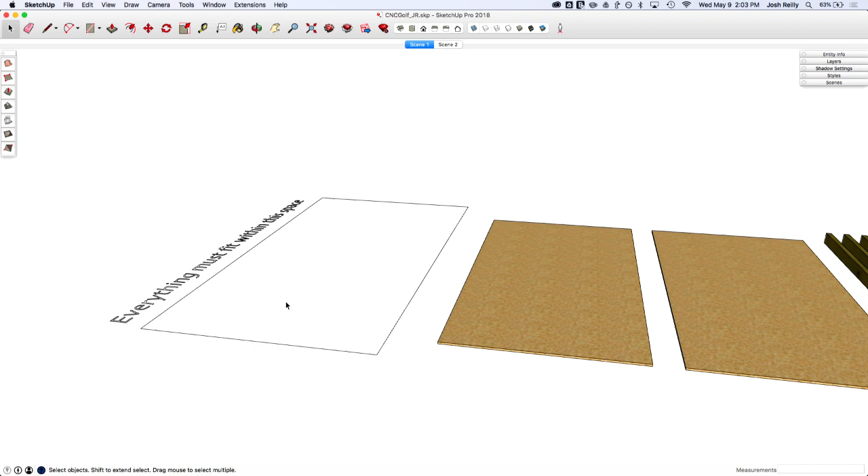All right, I'll start here. Am I connected there? Cool. I'm going to take a little bit different approach than Aaron might. What I'm going to do is make a skin that I can morph around some structure, which I can then pull material area off of instead of just cutting up some of the stuff here. So we'll see how it goes.

The first thing I'll do is grab the rectangle tool. Something we should point out is Josh and I have come up with these designs independently, so it's going to be fun to see what we have, because we don't know what we've done. I'm not even sure I'm going to draw what I plan to, so we'll see.

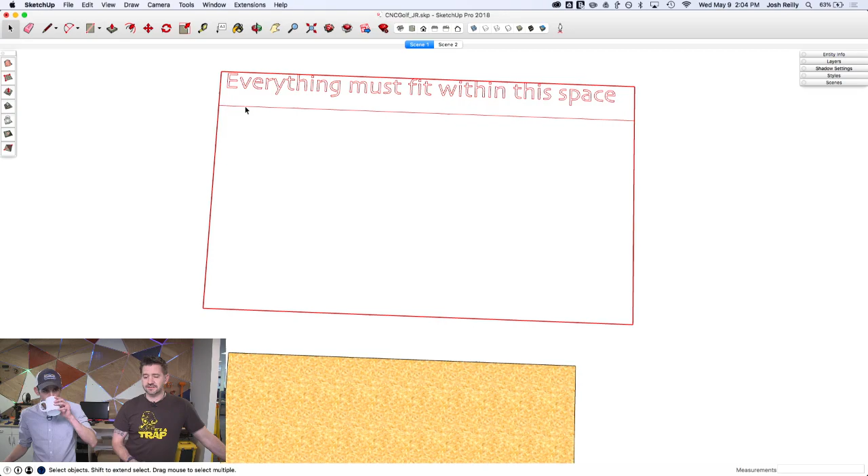Can you back up real quick and show the template? Yeah, so I'll erase all this great geometry—sorry to put you back, that one's on me. So this is the original template. Pretty self-explanatory. The group right there is locked, so if you pick on that, you can't change or modify that piece. Then the other 2 pieces, the ones that'll actually be cut from, are there to the side—the 2 pieces of plywood that'll be cut and the 4 2x4s on the ground next to the space you have to work inside of.

Yeah, so it's 5 by 10, right? Yep, 5 foot by 10 foot is the maximum footprint.

Okay, so I'm just going to divide up this surface here, looking for the midpoint so I can start to push-pull something. Get rid of that line, push-pull this—let's go 6 inches, see how it works. I'm going to get rid of that middle chunk, I don't need that. And I'll do a reverse faces here, and then I'll group that.

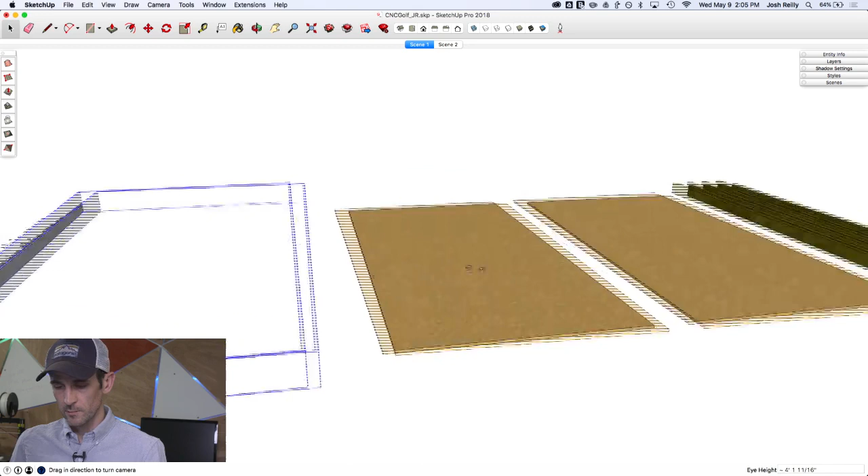And then I'm going to use the Sandbox—that's kind of like a boundary for the whole hole. Yeah, I thought about using the pieces of 2x4 over there, but I need those for elevating some of the stuff, so I'm going to use some of the extra plywood. Okay.

So I'm going to go to the Sandbox Tools now, which is in View Tool Palettes, and it's not an extension, it's actually a native tool set, Sandbox. I'm going to use this because I want to use some auto fold with SketchUp. I want to show how that would work.

First thing I'll do, you can see in the bottom right, it says 1 foot grid spacing, which is what I want here. I'm going to go 5 foot that way and then 10 feet this way. And I'm doing that because if I drew a rectangle of that same size, it would be all one surface, and autofold wouldn't work quite the same.

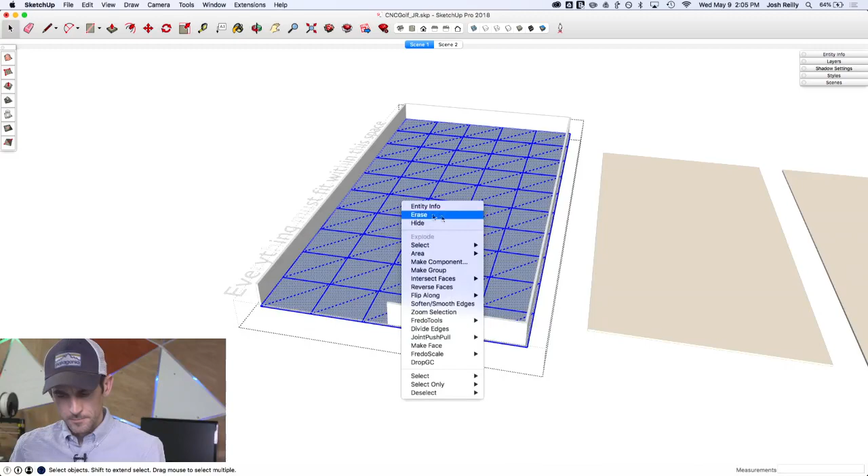So you'll see here how that works. I'm going to go in here and reverse those faces, and that's a good starting point. I don't care too much about the overlap right there right now, I'm going to leave that.

So you're really using Sandbox tools not necessarily to create smooth geometry, which is what a lot of the tools in that tool set have, but actually to create that initial geometry to work from.

As a little preview here, if I grab some of these quads, actually they're not really quads. If I do hidden geometry, they're triangles. Which is if you delete one of the hidden lines there, it would be a quad. But anyway, if I grab some stuff there and use the move tool and go straight up, you can see I can pretty quickly start to modify that surface.

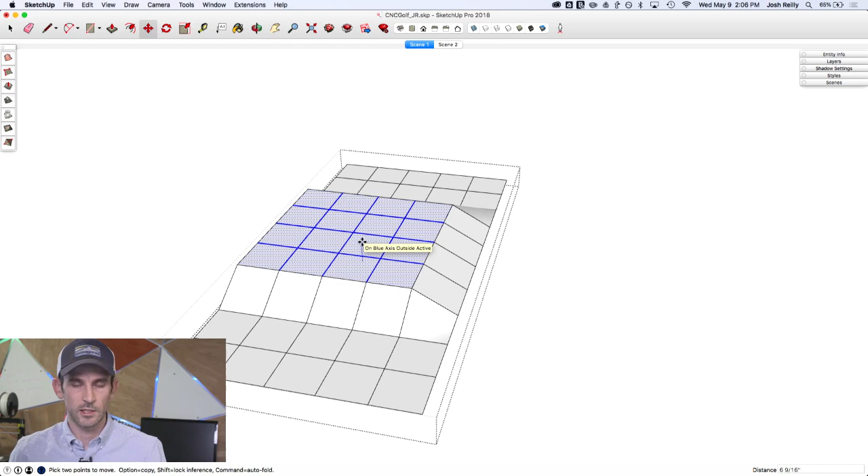So I just wanted to try this and see how it would work instead of using chunks of wood and just kind of use the rotate tool. So that's the goal there.

I'm going to first move these 2x4s off to the side here because we got some power tools coming in, need a little more space there. So the way I'm going to break up this board is I'm going to jump in here and divide it into 2-foot sections. The way I like to do this is just copy this rectangle, 2 feet and 3 times.

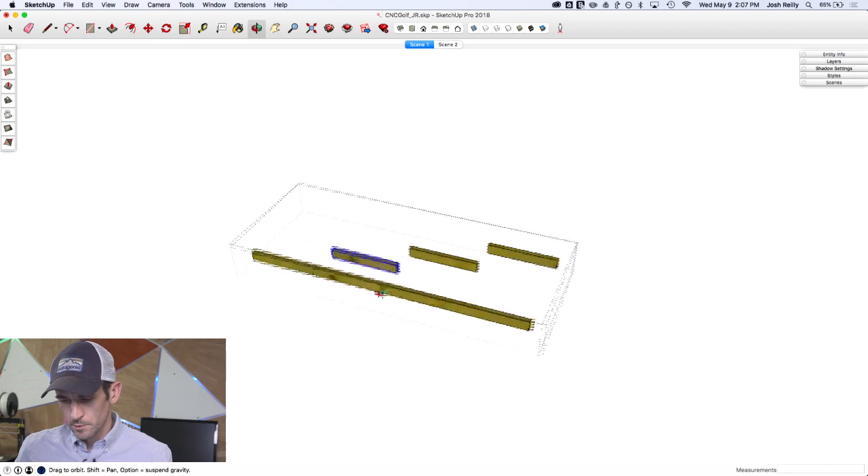That way I can just kind of grab this geometry. If I turn X-ray mode on, you can see kind of what I'm doing here. So I'm just going to copy that out, copy this piece out. Obviously I don't have to do this, I can create a 2-foot long piece and copy it 3 times, but in the spirit of fabrication, kind of building this like we're going to fabricate it, I kind of like doing it this way. But it's definitely a little bit more work.

I'll reverse these faces. But it is a good way to assure that you're actually using the material that's provided and you're not using anything extra. You're not going to accidentally require 12 2x4s when you actually only had 4 to use.

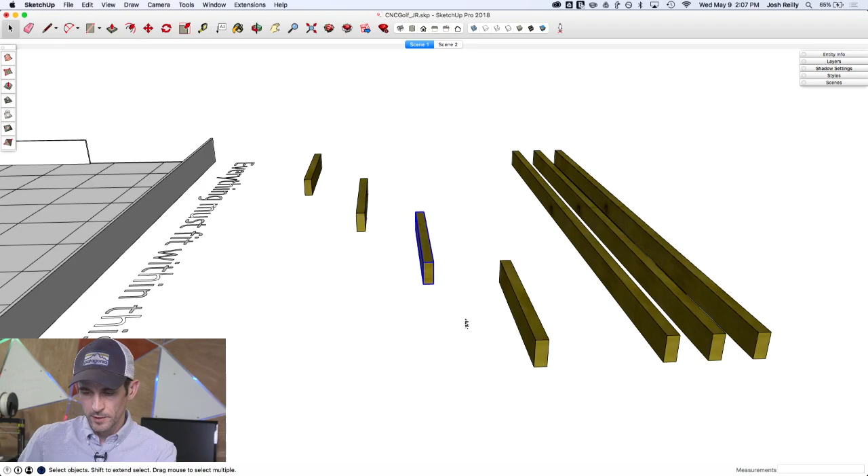So I'm grouping these little pieces with a shortcut for make group, just using G. And that's an important piece too, as we talked about this earlier, making these pieces groups intentionally rather than components. Because as you put these in, you want to be able to modify them one at a time, not have a modification to one affect all of them.

Exactly, yeah. And so now I'm going to just make a kind of a little box here, and I'm not going to worry too much about how these are connecting right now. Just want to get this kind of quickly going here.

X-ray is really good for doing things like this where I can pick the right points a little faster. So I got those connected, and we'll make a group out of that piece, and then I'll just position this where I might want it in the model. In this case, I'm going to throw this in the corner. So this is a little bit of structure that I might try to manipulate the surface onto.

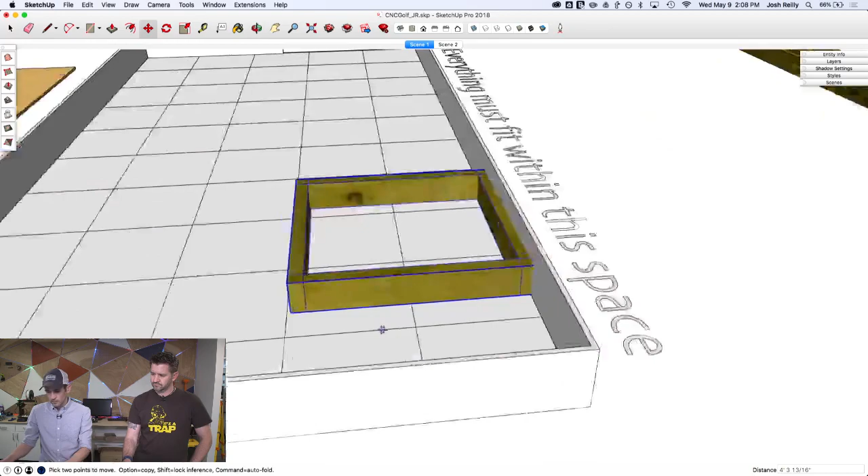So let's go and grab this corner here, go to X-ray mode, toss it in the corner there. And so you can see here, the goal now is to jump in here and pick the right surfaces like this. So I can use the auto fold, and it's only going to affect a quadrant of this larger surface. And I can hold down shift when it's in the blue axis and then snap on the top of that wood.

So of course I can see through that surface now and see the wood, which I wouldn't want in the end, but for now I just want to get the surface area, so I'm okay with that.

So I can keep going, or do you want to start yours? Sure, we can hop over.

We'll take a look at different ways to possibly go about starting this model up. Josh and I actually designed in bubbles, but we did not design complementary - we each designed our own things. So I'm going to go about mine in a little bit different way, but we'll see how that works. It'll work well, is how it will work, but it'll be fun to see how the differences turn out.

I'm going to work off of the exact same template - this is the same thing that Josh has. I'll have my locked group over here, and then my pieces I can work from here. I'm going to start designing shapes knowing that I'm going to have to come cut them from these pieces.

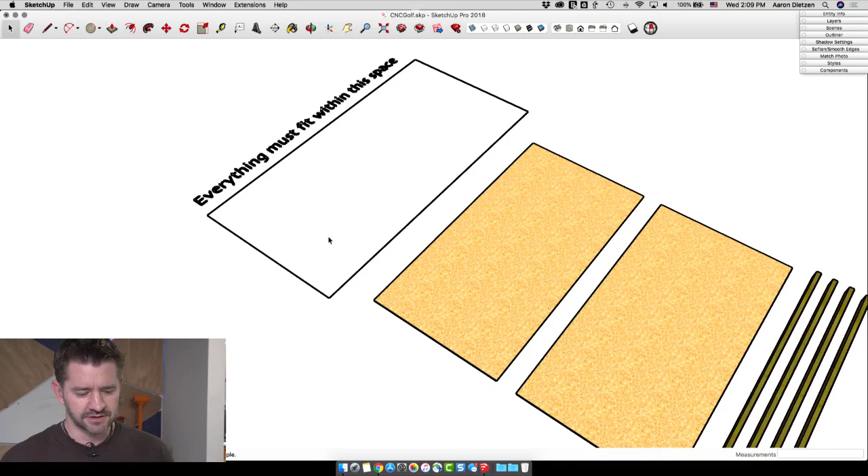The first thing I want is a half circle. The general design of my hole is going to be a platform here with a jump up to a platform over here. So rather than having a square right here, I'm going to create a half circle.

I'm going to start with a circle and pull that out 2 feet. I'm doing 2 feet because if I cut this across like this, I know this shape can get cut out of this piece of plywood because it's 4 feet across. So a 2-foot radius makes this a 4-foot wide piece.

I'm going to take that piece now and use push-pull to pull it up 0.5 inches, just a half inch, and triple click and make group. That is one of my pieces.

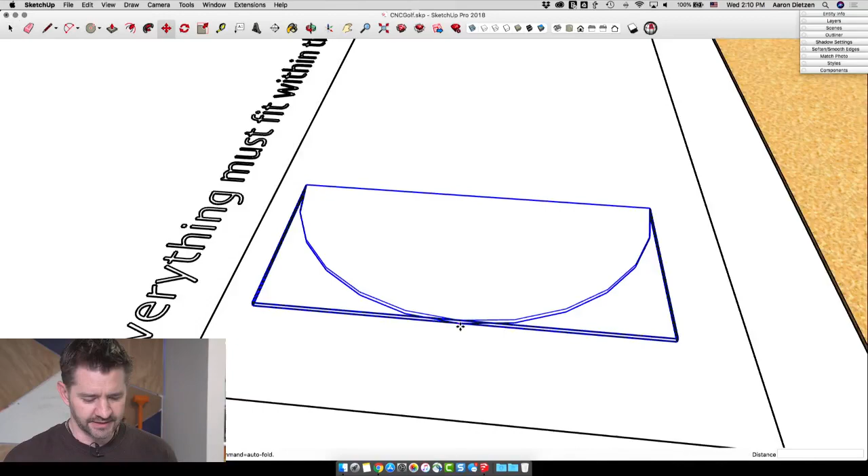I'm going to line that up right back here, right at the - ooh, a little jumpy, too much coffee this morning. All right, let's try it again. Where's the middle point? There we go.

That's going to be the base that I'm going to start the ball from, and I want that to go forward and then go up a ramp.

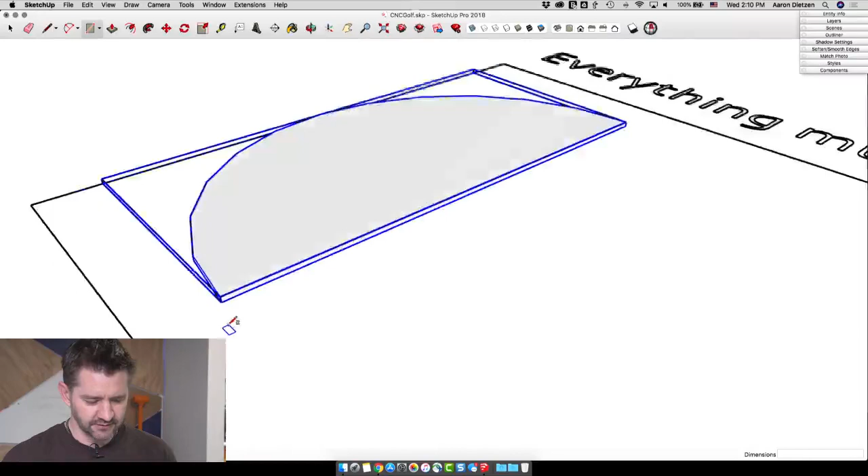So I'm going to create a rectangle right here, using this corner as a reference, pull across to here, and get in there. There we go, bring that out - we'll say it's going to come out 3 feet. So 4 foot, comma, 3 foot. All right, there we go, that looks pretty good.

And I want to take that, and I'm going to do this a little bit different - I'll just pull this up to get that same half inch, and then triple click and make it a group.

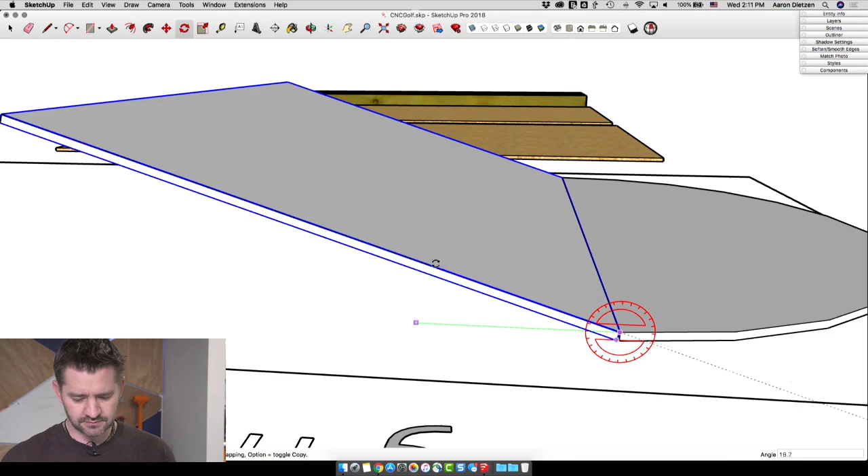Now to actually get the ramp, I'm going to use the rotate command, rotating from the top here. I'll click right there - see it snaps to the red. Click anywhere on this point and just pull it up. I don't know, how's 20 degrees sound? Good, I like it. All right, we have consensus. So that looks pretty good.

It's a little dull though, so I might come in here and chop this up a little bit. I'm just going to draw a line right here to indicate where the center is, and then maybe I'm going to do something.

I'm going to select this line right here - no, I'm not, I'm going to come this way. I'm making this up as I go. I'm going to come over here 6 inches, and draw a line down, say about 10 inches.

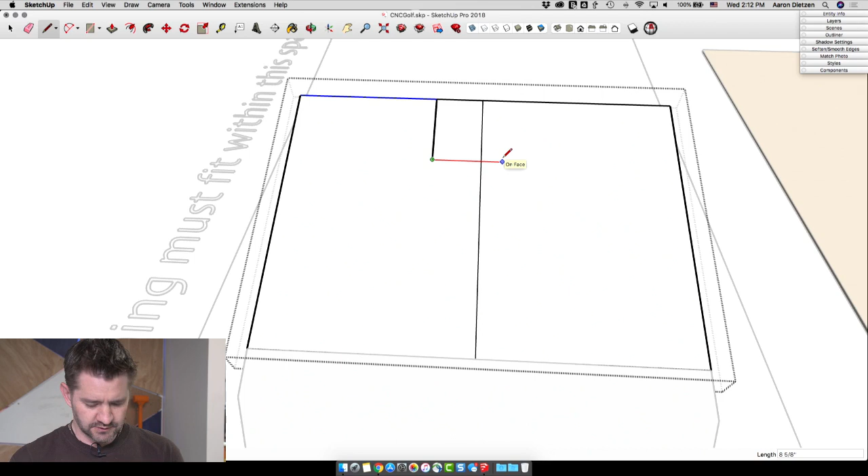Whoops, that was 10 feet - that's too far, 10 inches. I'm going to come across 12 inches, and I'm just using lines here, snapping along the axes and then typing in the dimension. At this point I can type it, click right there.

All right, I want a little gap in the middle there, so I want to make it so they have to choose one ramp or the other. So I'll block this off so they can't go up the middle.

It's still a little big here, so what I'm going to do is come from this middle point here, drag it down here. So again, I'm not worrying too much about specifically cutting out of a piece, but making changes to this geometry that I know will fit inside this space. All of this that I've created so far will come out of one piece of plywood with no problem.

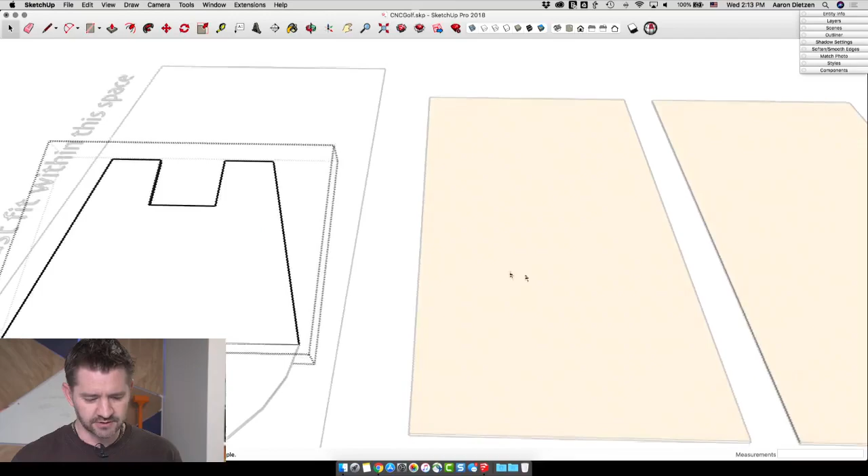The other thing I'm keeping track of is my 1/2 inch material depth. So if I look down here where this ramp transitions, I don't have any materials crossing over each other or anything like that. I know that these two pieces can physically fit like this when it's actually fabricated. So that looks pretty good.

Now I'm going to come in here, put a couple supports in real quick, and then maybe some boundary pieces, and then we'll hop back over to Josh.

So I'm going to have a 2x4 standing up from the ground to hold up this corner. I'm going to click right here, drag down the blue axes, hold on shift, and snap to something that's on the ground. So these letters of the template work.

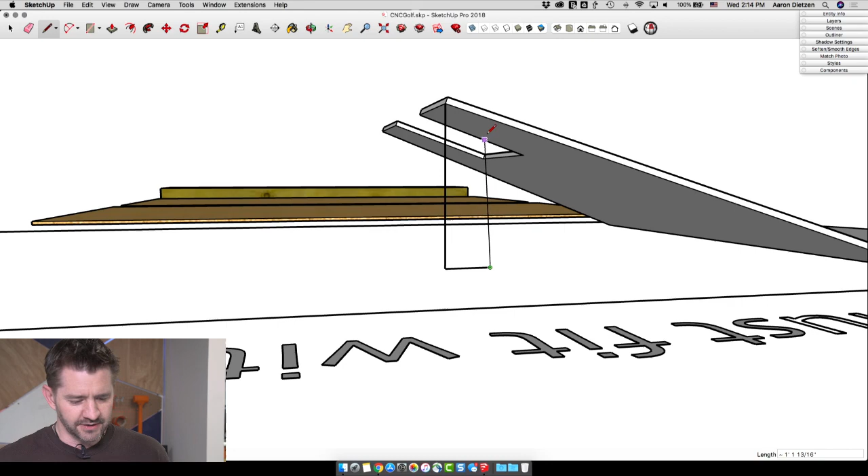Click right there. I'm going to come over the green axis 3.5 inches, because that's how wide a 2x4 is. Silly Americans call it 2x4, even though it's 3.5 by 1.5 inches. I'm going to come up the blue axis till I hit the face of the ramp, and then back up here. That'll give me a single plane there.

Now I can take that and pull it across here, use push-pull to make it 1.5 inches, enter. All right, so there is my one support.

I can take that and make it into a group, and I can copy it, option here. Again, I'm just using the move tool, hitting option or control before I click, and place it. So there we go, we got a ramp, looks pretty good.

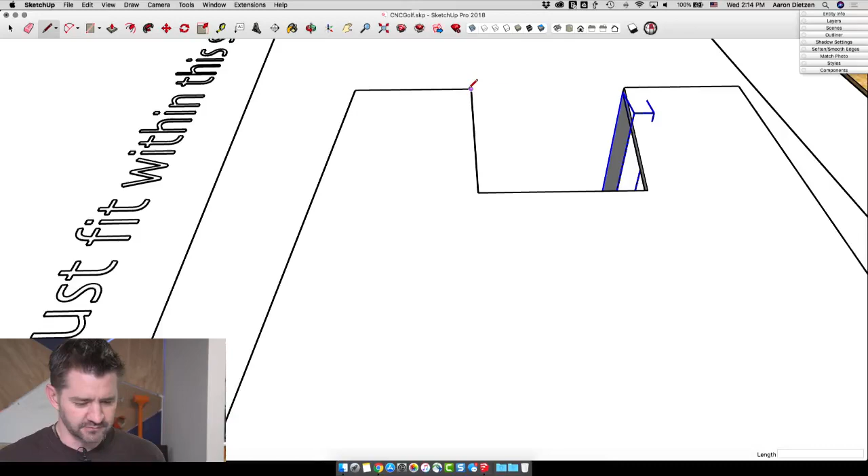I do have a couple things I want to change here. I want to get some 2x4s in here. Like I said, I don't want people to be able to take the middle of the ramp, they have to go to one side or the other. So I'm going to come over here.

I'm just going to draw the footprint of a 2x4 on this slope. So I'm going to come across 1.5 inches, and come all the way down - actually it doesn't matter how far I come down because I can use push-pull. Come back across.

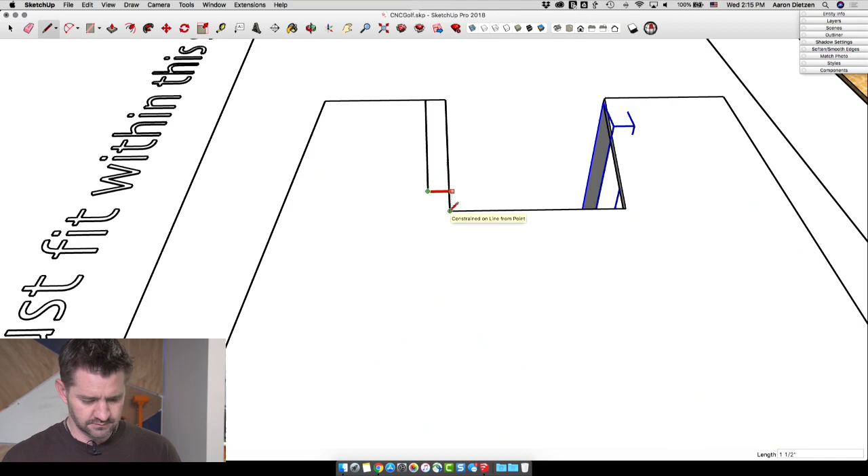I did not go, something was out of plane there. All right, try that again. This is what it's all about - screwing up live. All right, there we go.

So I drew my rectangle on top of that surface, and I can now pull that up 3.5 inches, and there's my 2x4. Triple click to select all the geometry, right click, make group. Again, just like Josh, I'm making a group because I want these pieces individually editable.

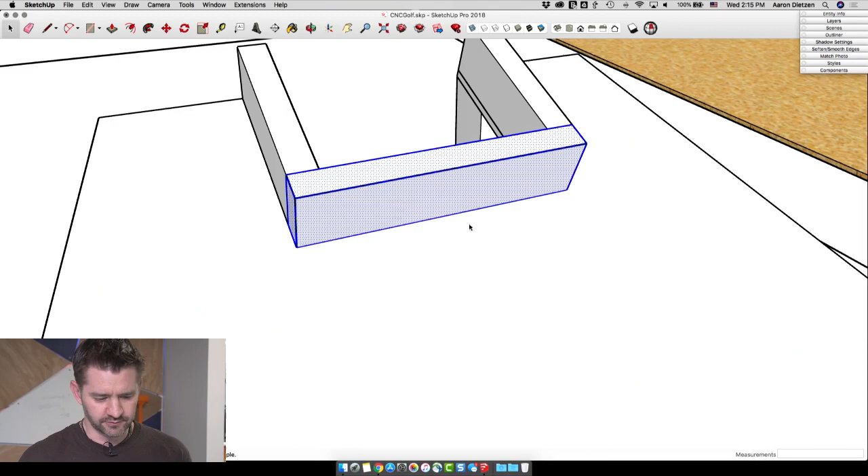I'm going to copy it across here. And then maybe I'll do the same thing right here where I'll come across like this. I'll come down 1.5, back over here 1.5, 1.5, pull that up, and again triple click, make that group. Last thing I might do the same thing down the sides.

I want to have something to prevent it from rolling off the side here. So I'm going to grab this, again with move, option or control click to drag it over and put it right here. Obviously that's an issue - I do have an angle here.

So what I can do is use the rotate tool, and I want to lock my rotation to this plane. So while my little compass is on that plane, if I just hold down shift, you see it turns magenta, and the surface I'm on turns magenta also. So as long as shift is held down right now, I can pick any point and it'll rotate perpendicular or parallel to that surface.

In this case, I'm going to choose this point. Then I'm going to grab this point and bring it over and let it snap to that line. I can use the same thing, double click into this group, push, pull, and pull it down there. Probably do the same thing, get another piece over here, and we'll hop back over to Josh while I do it.

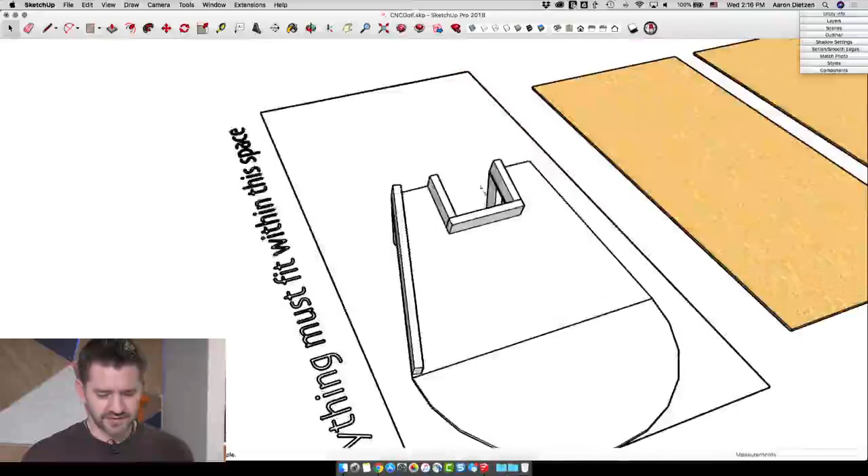You guys don't need to see that twice. You got the idea. Once Josh has a little more input, we'll hop back over and talk about where the balls are going to land once they leave the ramp. All right, let's do it.

First, I'll answer a couple questions that came through. I mentioned Sandbox Tools when I first started. I think the question is why are they called Sandbox Tools? Well, I didn't name them that, but I can guess why. Let's go to my screen here real quick.

So I have another surface here. If I go to this Smoove tool, S-M-O-O-V-E, it's not misspelled, that's what it's supposed to be called. You can see here that I have a radius of 6 inches. So before I start using the tool, just like a lot of tools in SketchUp, I could say, all right, let's do a 4-foot radius, so the radius of influence for that.

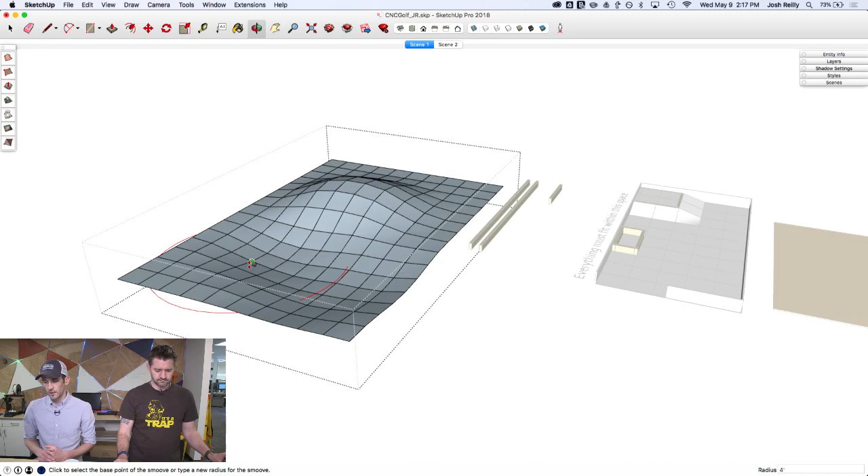You can see here as I depress and kind of push-pull things, that's kind of why they're called Sandbox Tools. They're often used for free-form landscape type stuff, but of course there's lots of ways you can use tools in SketchUp, not necessarily what they're intended for. So I think that's why they're named Sandbox Tools.

And then a question as well regarding what's the shortcut for X-ray. I made X-ray a custom shortcut, just use X. If you use X, you should know that when you do a linear or radial array in SketchUp and you do a number and then X, you can also do X and then a number to define copies. If your shortcut is X-ray, you have to do the number and then X.

If you do X, it'll engage X-ray, so just know that. It is a custom shortcut, like you said, though, so you can actually assign it to any key you want. And then we have one more question about the purple inferencing.

That was something I showed. Anytime you lock to a geometry, whether it's a line or a surface or anything like that, it will show up by holding shift. You can also get a purple inference from the down arrow key. Left, right snap to red, green axes, up snaps to blue. Down will actually snap to the last geometry you were hovering over.

So if you're drawing a line, you hover over a line, hit the down arrow, it'll snap to parallel to that line. Down arrow again will snap perpendicular to that line. So magenta is just the not red, green, blue axes reference. Yeah, it's anything but the main cardinal directions or the main red, green, blue.

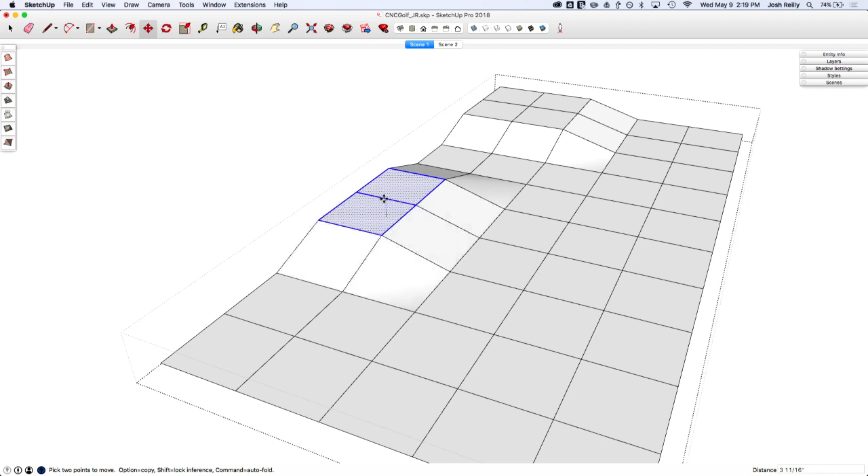Okay, back on my screen here. So while Aaron was talking, I chopped up this 2x4, so you guys don't need to watch that again, but I made it a 2-foot by 1-foot piece, and I'm going to jump into the Sandbox Tools and just select these two. And the way I'm doing this is I'll turn the rest of the model off temporarily, just grabbing those two squares and bringing them up, and with the Move tool you can do that.

And if I go back and see the rest of the model here, I can hold down Shift and then kind of snap on that height. All right, looks good. And look at that with X-ray mode. Looks pretty good. And then I'll move on to something over here now.

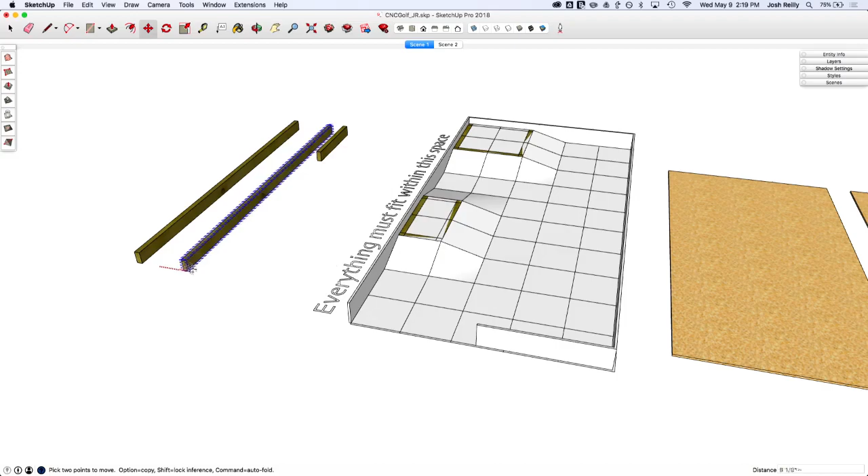I'm going to grab a full length of one of these 2x4s and just toss that over here as kind of a divider. So I think I'm just going to put this in the corner here. And X-ray often helps here. Even when I can see a pretty clear endpoint, sometimes X-ray just makes it a little bit easier to align to things like that. So that's why that's a pretty nice shortcut to have.

I'm going to go over here and make a bit of a ramp. And in this case, I want to delete some geometry. Well, I'm going to first group this stuff. So I'm going to group this run of squares here, go in, and erase some of these lines so that if I move this square up, it will auto-fold the rest of that geometry. But you'll notice here it's not actually going to work like I would expect.

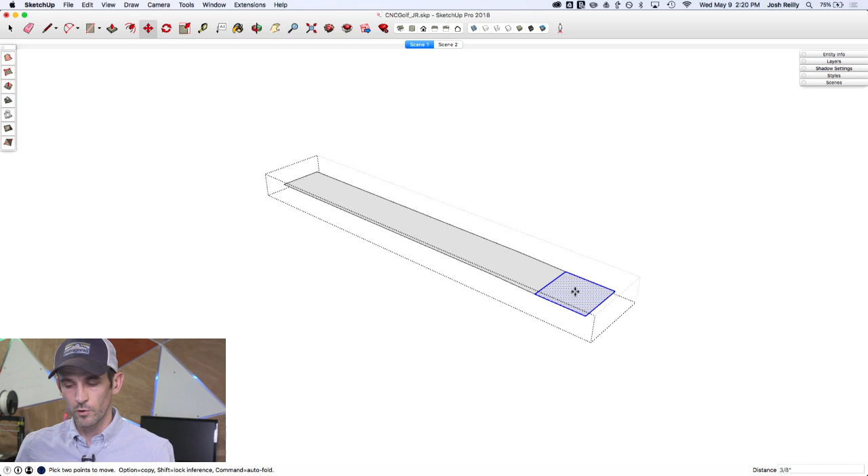And that's because with the Sandbox Tools, I was given some extra geometry here that I don't really want. So I'm going to get rid of these diagonals. And then now, if I move this up, I can just say, let's go 1 foot high.

And are we still live? Yeah, still going? Mm-hmm. All right, that's good.

Cool. Everybody got quiet over here. We're in awe, just couldn't speak and watch at the same time.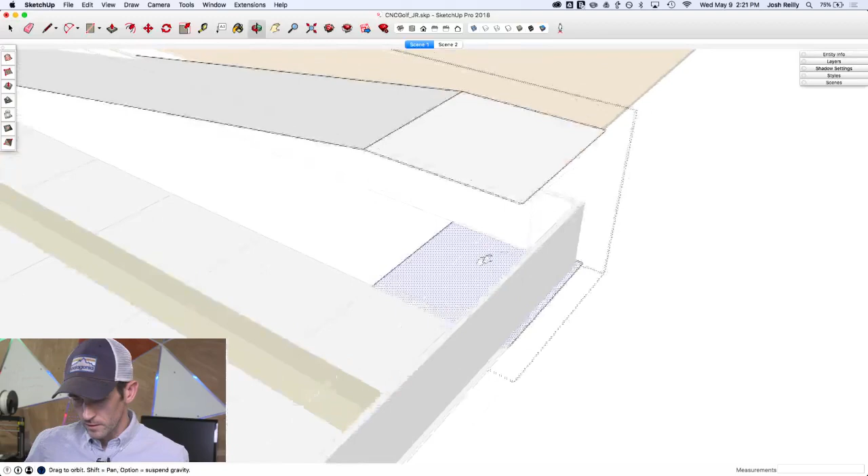Okay, I'm going to grab this piece and drop it down, copying that down to the bottom here. Let's go ahead and make the end hole here. I'll turn the rest of the model off and inference that midpoint, find the center, and make a 4-inch hole. Actually, I want a 2-inch radius. There we go.

So what I'm making here is kind of a ramp, I'll call this the 'where heroes roam.' If you get down here, you can try to go on this ramp that doesn't have any edges and drop the ball through this top hole, or you can go around this way. That's what I'm going for.

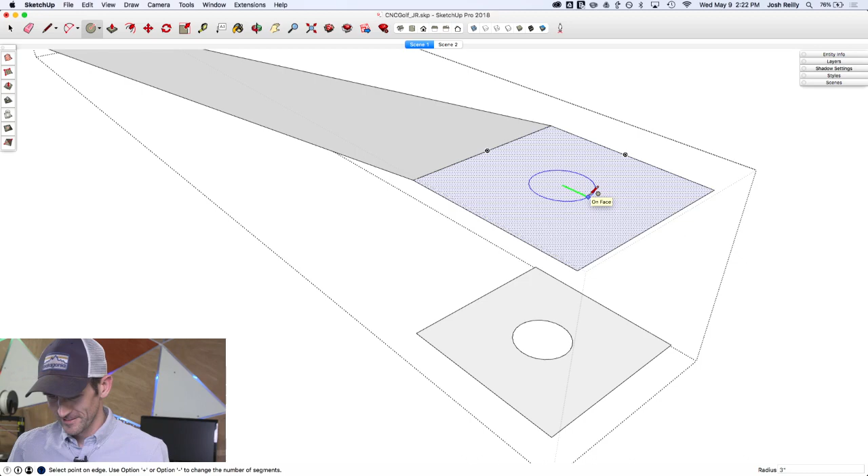I'm going to make this hole a little bit bigger. So it doesn't sound like what the heroes would do, but that's okay. Well, you're rewarded for attempting to be a hero. All right, so that's a bigger one if you want to go that route.

Okay, I think I'm going to also grab a support for that. So you can see what Josh is actually doing is using those 2x4s as kind of stock material that he's cutting from. You're actually referencing and removing pieces as you use it.

A little different. So what I could do on Aaron's comment there is, let's cut this piece out. Again, I'm inside a 2x4 component. If I turn the rest of the model on, I'm still able to inference other geometry, which is pretty cool for things like this where I can cut this away.

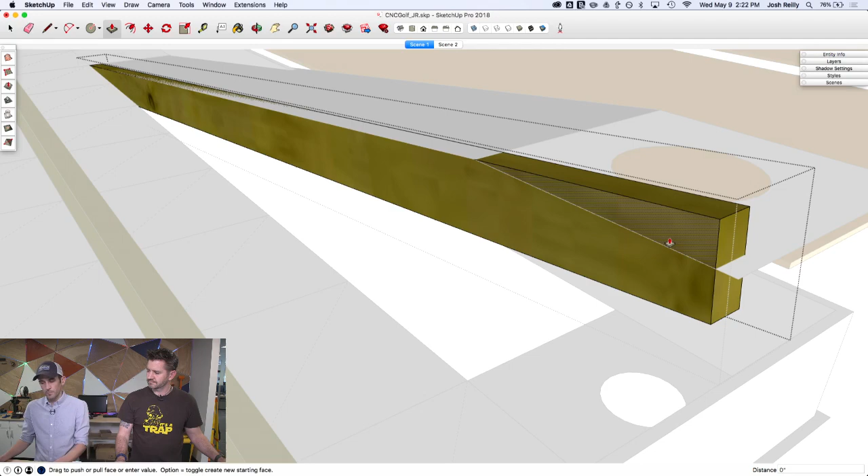But let's say we wanted to use this scrap. Maybe I'll copy this up just to remind myself, hey, I've got a little bit extra wood there. Then I'll pull this away. Actually, let's make this a full size there. Might as well color that wood color. Then I can pull that away to get rid of it.

And got a nice doorstop there, I guess. You never know. Cut this out and paste it in place. I'm using a shortcut here for edit, paste in place. Paste in place is a great way to move something from one context to another.

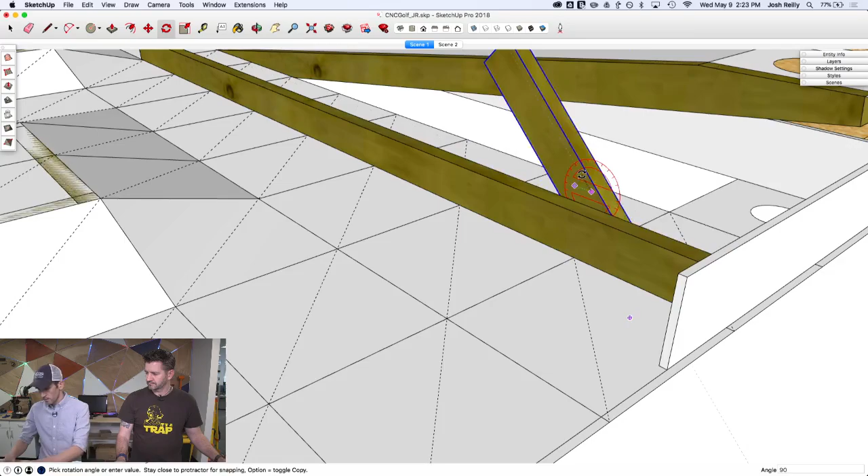So there's a scrap over there, and that's looking okay. Obviously we need a little bit more. This scrap from the previous piece is going to be a nice vertical support, so I'll rotate it up 90, and then grab a corner. I'm not going to worry about the extra on this part for now, so got some extra on the bottom too. It looks pretty good there, and turn off hidden geometry.

So we can go back to you, Aaron, or I can keep going. What do you think? Sure, I'm ready to do some more stuff. Okay, as usual. All right, so

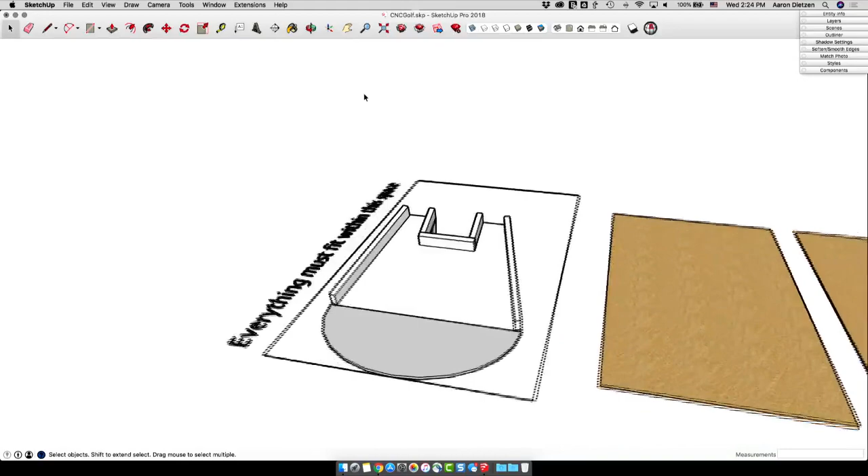we'll hop back in here. And this was actually not intentional when I started modeling this, but when I first started I put this geometry in, and I realized when I went to the top, it looks an awful lot like the Millennium Falcon. Don't act like that wasn't intentional.

Initially, well, it was this time, but on my first design, I thought it would be cool to not have a square here and then to have these two ramps, and then I went, hey, that's awesome. But it helped me for the second part of my design because I decided that if it's charging towards something...

what I want to do is take, so this Millennium Falcon ramp took up most of one piece of wood, so I'm going to use the other piece, cut it in half, and create two things.

So I'm going to come over here and create just a, wow, that's some weird snapping stuff going on. There we go. So I'm going to make a 4-foot by 4-foot square.

I'm going to pull that up half an inch to account for the other half of my piece over here. I'll triple click to make that a group, and move it so it's centered in my space, centered with the ramp.

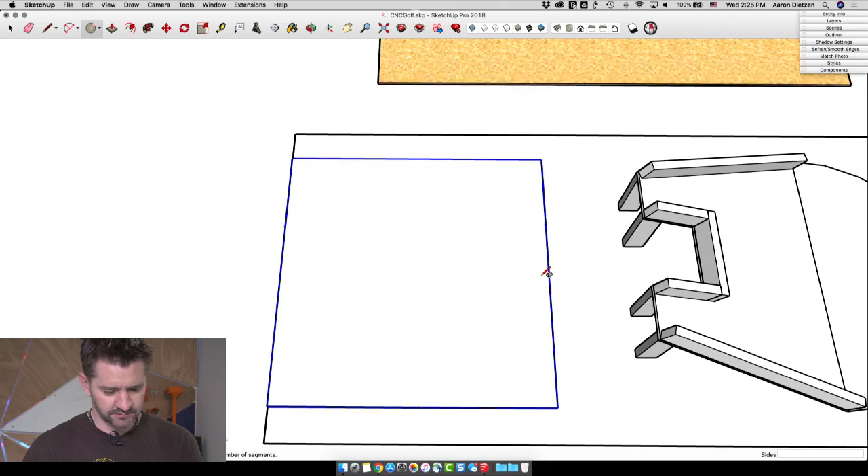This is where I'm going to put my hole. I'll put it maybe, right about, off the center, 2 inches. I did that out of context, so I'm going to delete that and double click and try again.

I'm going to draw a circle. Use that middle point, pull it in here, 2 inches, and then pull that to the bottom, let it snap to that bottom face. There we go. So that's the piece it's going to go onto.

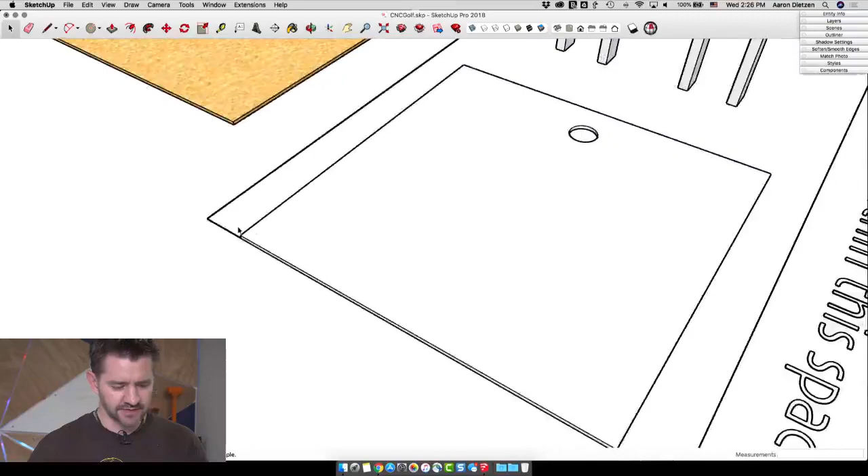Obviously the issue I have right now is if I hit that hard enough, it's going to clear the whole thing. So what I need is a backboard. I'm going to do a couple things. One is I'm going to put something to attach the backboard to, so I'll put a 2x4 right here.

I'll click right here, bring it over here. When I'm drawing a specific size, a lot of times I'll rough in where I want that rectangle to go, then look at the dimensions field in the lower right corner. Right now it shows I'm drawing something that's 4 feet by about 2 3/8 inches.

So what I actually want is a rectangle that's 4 feet long, comma, 3.5 inches. That's a 2x4 laying flat. If I pull it up another 1.5 inches, all right, so that is my support.

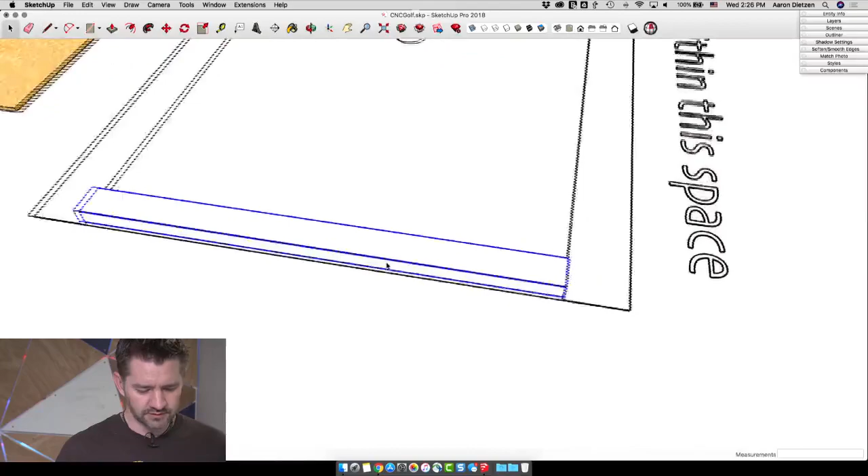Now I'm going to draw one more. Actually, I'll use the same thing. I'll grab this group I just made, grab it by the midpoint, click right here, and hit Option to make a copy. I'm going to put that at the middle of this 2x4 right here.

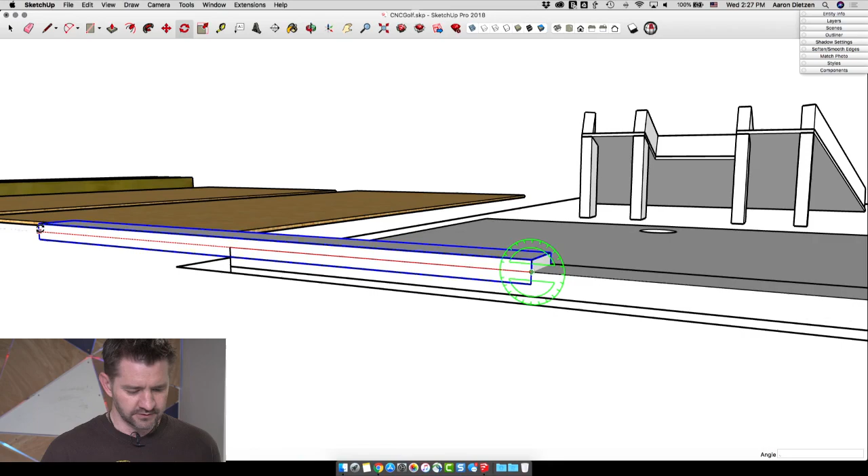So they're overlapping right now. I'm going to hit Rotate, click right here, and drag that vertical. All right, there's my backboard. 4 foot piece, 4 foot piece. So this is one 8 foot 2x4 here.

Now I want to put my backboard in the middle here. This is where I got inspired by my original design, because rather than putting just a rectangle here to bounce it off of, I figured I'd put a plywood version of the Death Star.

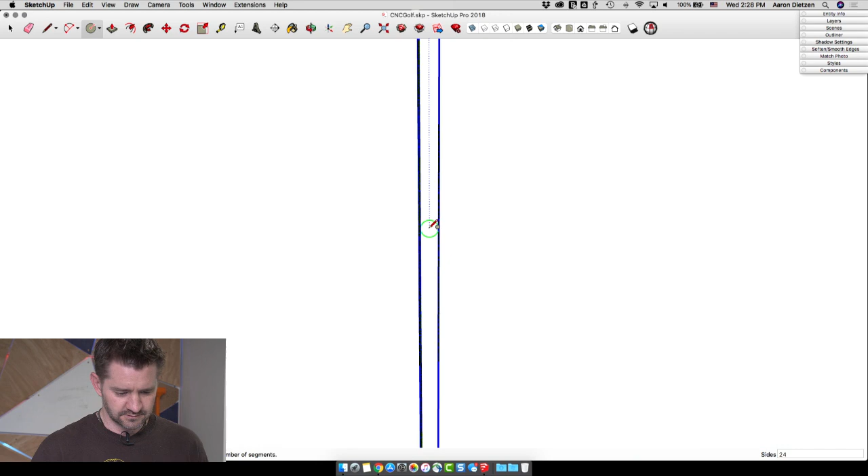Don't get too excited, that just means it's going to be a circle. I'm going to grab a circle and find the center of this 2x4. I'll snap to the middle point here, start pulling it across, then get this center point right here and drag that down. Let me zoom out a bit so I can see where the center point is. There we go, center's right about here.

And I pull that up. I could type in 2 feet, but if I snap right here again, because it's a 4 foot piece, the snap point at the top is 2 feet. Click there and pull that out 0.5 inches. Again, triple click to select all the geometry and make that one last group.

So from there, this was pretty much my simple design. I have a little ramp. I can choose to shoot on the right side or left side. It's going to go up, bounce off the Death Star, and hopefully end up down here inside that hole.

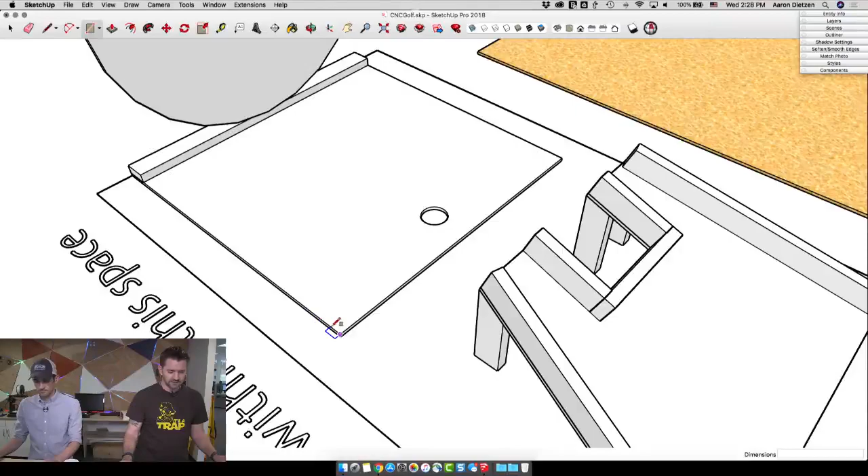I do have a little bit of material left, so if I wanted to, I could come in and maybe place one more piece of wood. I'll copy this again and put it right here, just as kind of a backboard. Maybe I'll rotate it vertical and use Move to slide it over here.

Then maybe I'll move this circle forward a little bit so it's not quite so close to the back wall. But that is the general idea. I actually have enough wood, I think one more piece left over where I could close that square up altogether, but it's a little more fun if it could possibly roll off into the inky blackness of space.

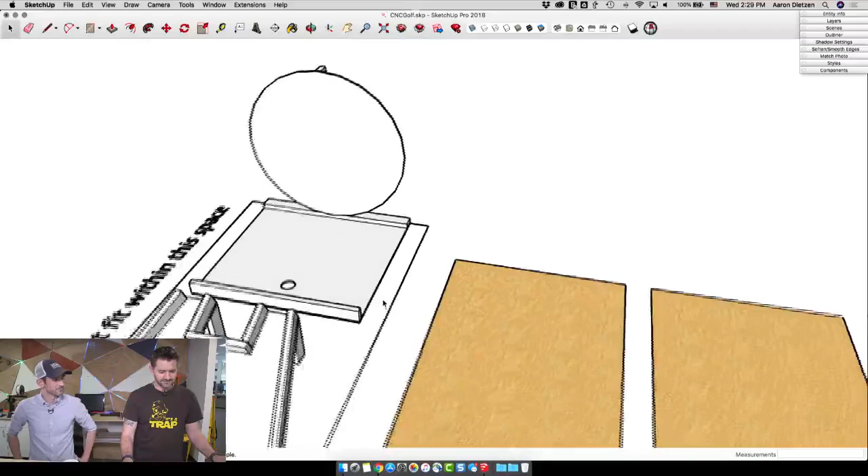Dangerous fun, that's right. So there you go, it's a little action scene too. Watch the Millennium Falcon fly over to the Death Star. Nice, that's pretty cool. In case you were wondering, that was cool.

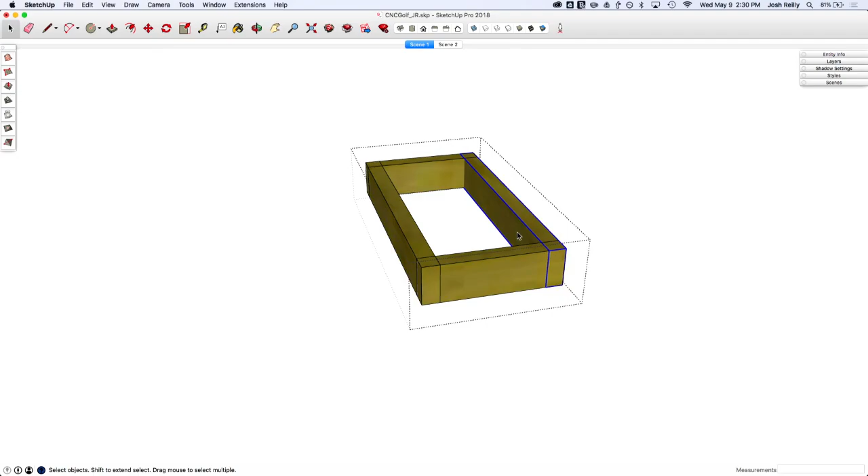So I added a few more things as Aaron was talking, just added some supports there, and I was realizing as I was doing this that this method's kind of cool, because let's say I wanted to make a modification now. If I wanted to move this over to the side, I can just do that, and this actually would save me some wood. So I'll do this, and then snap that to this piece. That means I can take this piece of wood out for future usage, and now I can easily modify this terrain, because if I do that and snap to the bottom, it kind of goes back to where it was.

And if I go here and grab these two, actually I should pull these supports out just a bit. Look at that, perfect fit, perfect. Not intentional, but that's awesome. I'll move this along the vertical axis, snap there. So there I just modified the course. That's pretty cool, got an extra piece now.

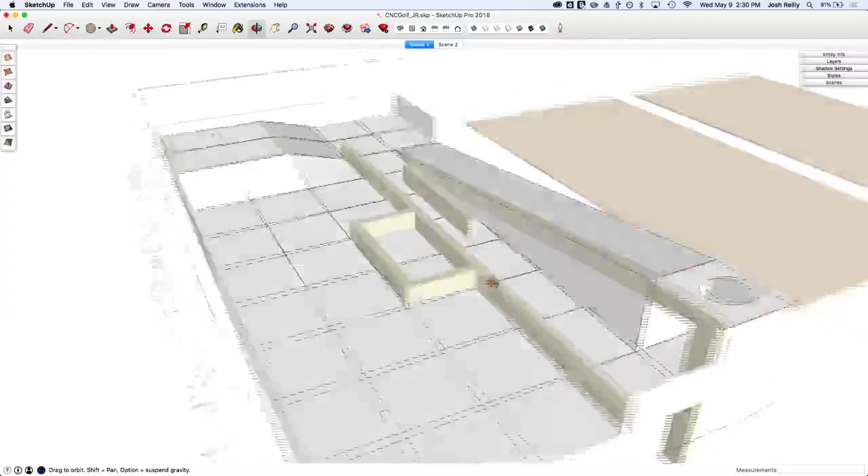Ooh, you know what, I actually don't want that to be angled, so I'm going to go back here. I think what I want to do is group, let's check this out and see what I have to group here. I need to group these separately, I think. Let's see if this works. If I group that, then go in, then do this, then go up, you can see it's now not going to... so it's going to auto-fold only what's in the group.

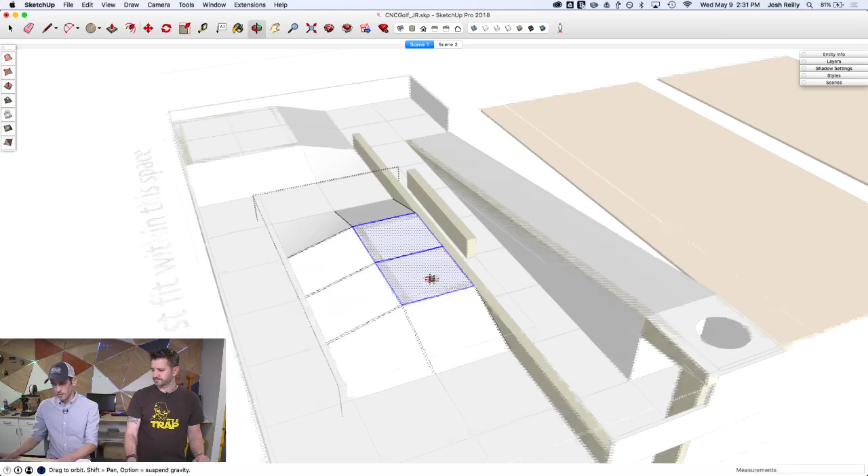So now I can more easily control that, and I've left this kind of flat for those people that have a lower caliber of bravery. They can go this route.

But you know what, I got an extra piece of wood now, so I'm actually going to put that piece of wood in the way, over here, paste that in place.

There's just no easy way through this thing, is there? Well, this is the easier way, but there's still fraught with peril, I suppose. It's light peril, but it's peril nonetheless. You can probably get around that, but it's to deter someone from not taking the brave route. So if you want to be a hero, you can try to one-putt that one up there, or you can go around.

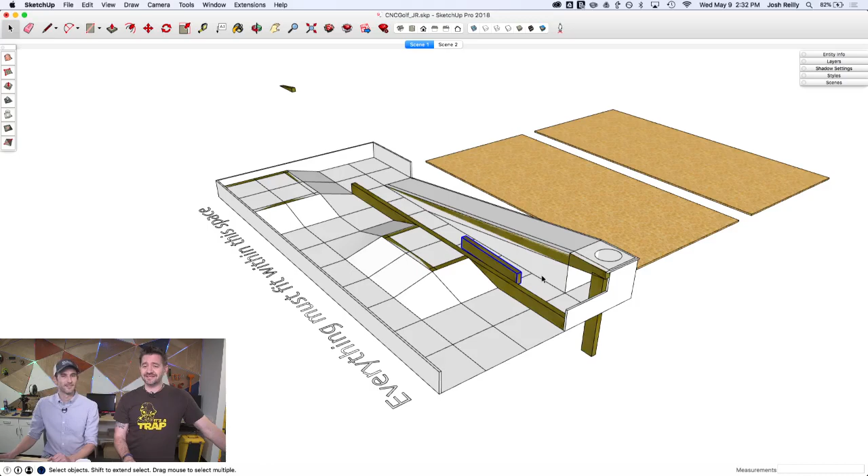Speaking of heroes, we just got a notification that David Kenyon is planning on coming to 3D Basecamp from Sri Lanka. Wow, so nice. I don't know exactly where that is, but I know it's far away, so way to go. It's just south of India. Josh is all over it. That's awesome, well we look forward to seeing you at Basecamp, come up and say hi to us.

Okay, so now I had a question with this, Josh. This looks like an awesome way to rough in geometry, but you're basically pushing around planes, right? This is flat geometry, not actually like plywood, it's just flat planes as of now. Conceptual at this point. Right, and now I can decide what I want to make, have some thickness to cut out. So that's a good time to do that.

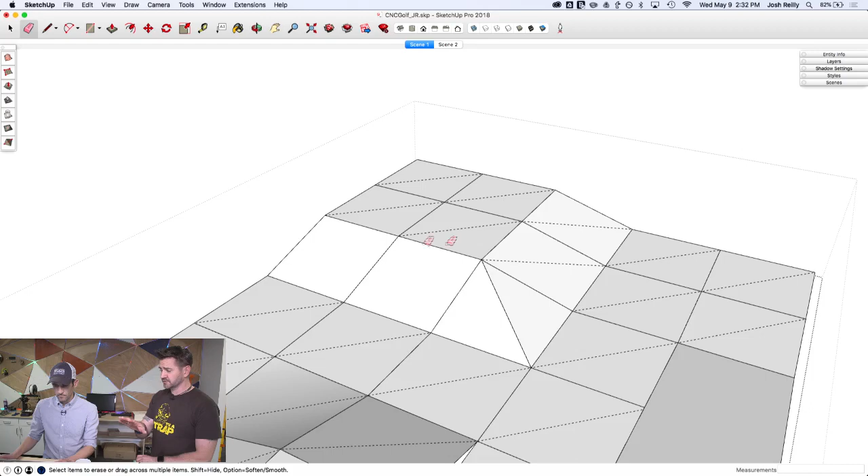So one thing I want to do here is optimize the boards. I'm going to turn on hidden geometry. Let's see, I want to connect this piece there, I think, and I don't need what's below, it's extra stuff there. This is normal, nothing special you did. When you create that grid initially with Sandbox Tools, those extra lines, those smooth lines automatically show up, and now I'm getting rid of them because I just want to push-pull the pieces that I would then cut out of the board.

So if I push-pull, let's make a group out of these first. That's a nice safe group. Jump in here, we'll group this as well, that as well.

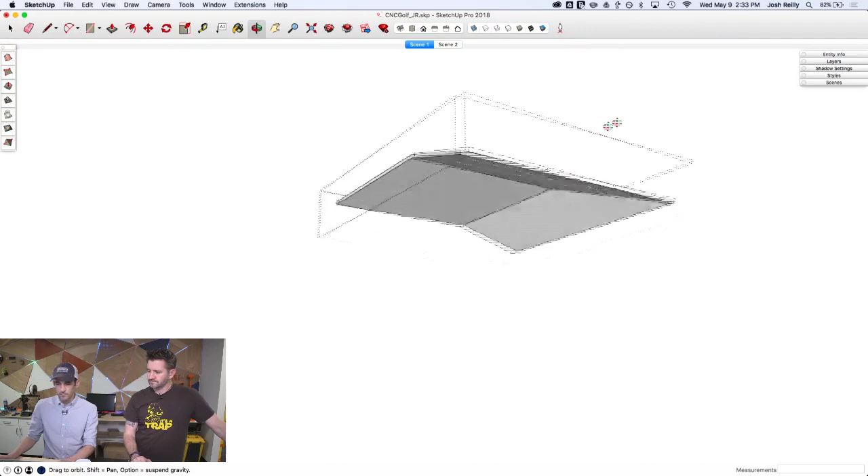Again, I'm using G for group, which is a custom shortcut—it's a lot better than doing the right click and making group. Now I can jump in and push-pull the thickness, which is 1/2 inch. Go over here, do that again, double-clicking with the push-pull to repeat that. All right, so now I've got some actual boards here. If I jump into this group, now that's a bit more meaningful chunk of geometry.

That's actually buildable, you could actually make that. One other thing I want to show here is if you're trying to get an area of the stuff you want to cut out, one option in SketchUp is to use area by material, but you got to be careful with how you use this. If I jump in now, you can see that this template Aaron made has this plywood texture on all surfaces here. So if I right-click and go to area of material, I'm going to get a number that seems right, but that's because we're inside a group.

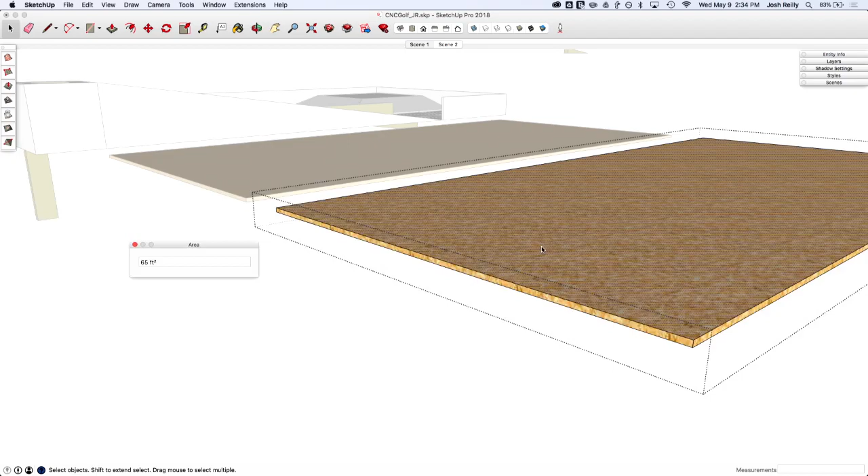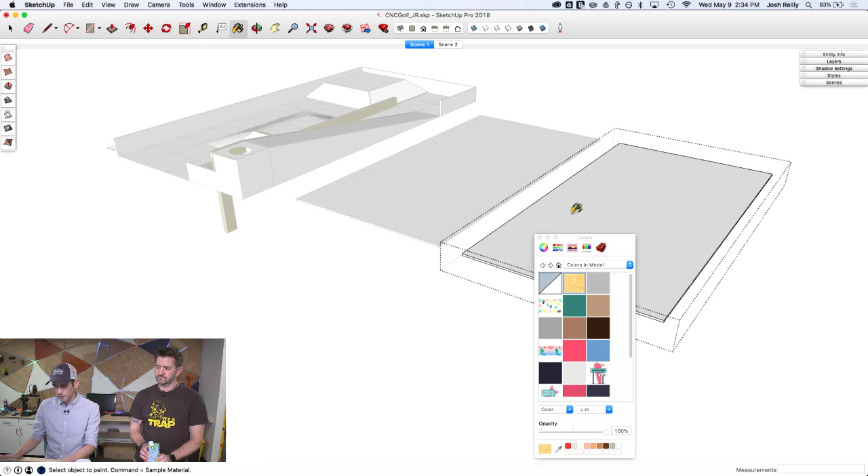It's taking the material area from everything inside the group, not outside the group, and it seems right because it's both sides. So if I really wanted to do this correctly, I would probably color these back to the default material. Go over here and do the same with this one. Now let's take that same color swatch and apply it just to the top on both of these. If I go in here now and right-click area of material, it's only going to be 32.

So this is a bit weird, but in SketchUp you need these to be ungrouped. Right-click and we'll explode that. So now if I right-click area of material, it's now 64 square feet. So now I kind of know what's going on there.

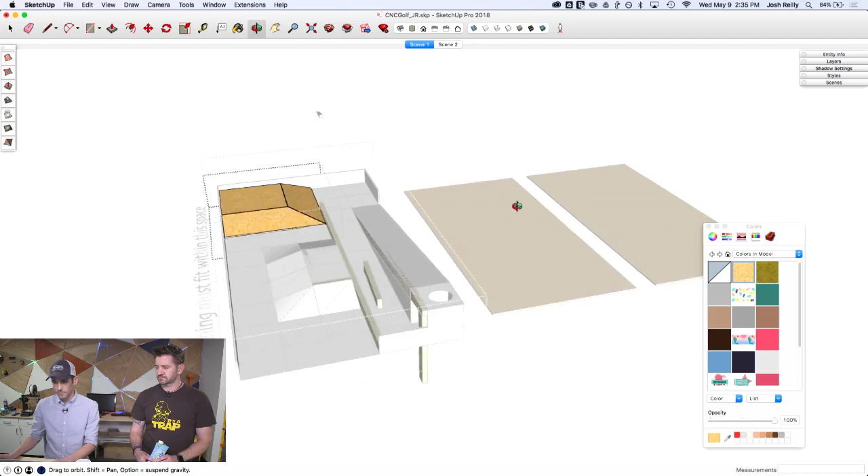So what I'm going to do here is sample this again and start applying this to just one face of these. So right there—that's a good indicator, a ballpark of where you're at. We'll see what happens once we get the total. And then now that I'm doing that, I don't actually want this material to be in that count.

You got to do your walls too. Yeah, there's a bit more work to do here. I had forgotten that the walls of your model were also that same material. So I'm gonna do that, get all those. I need to actually adjust this again because—this is important if you want to talk about why I'm doing this while I model here.

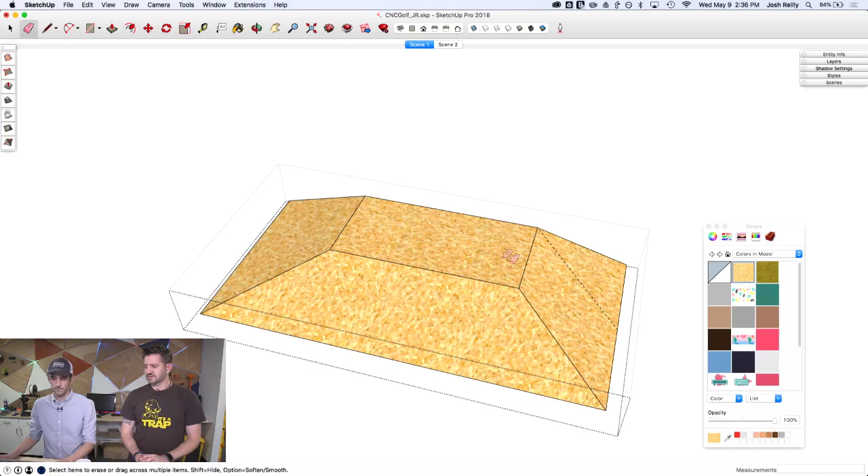Obviously the issue is Josh was using smooth geometry, but by actually going through and cutting it the way he's cutting it, this is actually fabricatable. We can't really take a big 4x8 sheet of plywood over to the CNC and have it cut into round, smooth corners or anything like that. What this will do is create geometry that's going to be something we can actually cut on the CNC. So let's toss—same thing here.

This is the potential issue with doing this, of course—the square footage may end up less, but one of those pieces is 10 feet long and your longest board is 8 feet. So, yeah, I'm doing this to make sure, because I cut my board out of pieces like I would in real life, but I didn't do that with the OSB or the plywood slabs. Right, so I don't actually know if I'm over.

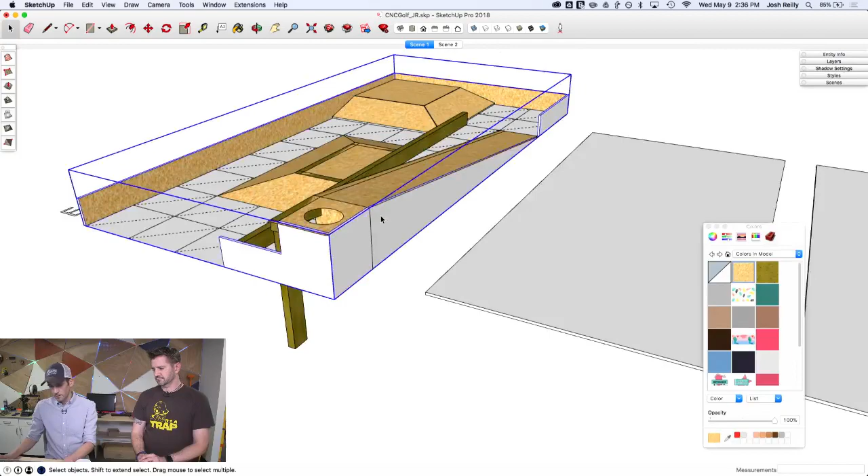Again, this is just a good way to get a quick check. I just want to see how close this will be. So let's go there, there, there, there, probably that one too, and then this side as well. And we'll just keep—oh, the inside's got it. So that one's all good. I think I got them all.

So I could now just check if I right click on one of these materials, area of material, we're at—oh, that's not right because it's not grouped. So what I would do now, let's just say I wanted to know this number, I would probably grab all of your geometry and copy it over to the side to do a temporary thing. So if I just explode everything now, a couple of right clicks here, explode, and keep going until I don't see explode anymore as an option. Let's try it once more.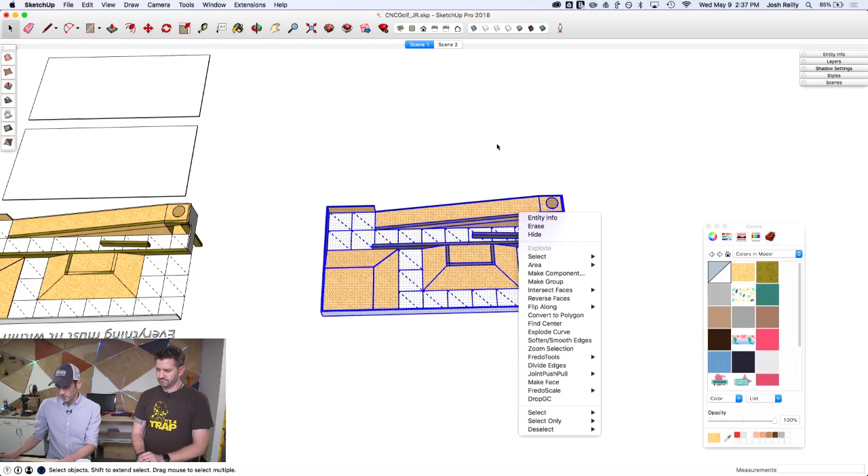Okay, good. So now that everything's out of its group, there's no nested groups here, I can right click. Hopefully this is a close enough number, 85. So I'm over the 64 with this. I'd probably take away something here to get it closer to 64. I'm only doing that to give myself a ballpark as I design, because that's faster than cutting up the board slowly and rotating it, I think.

This is actually an important part of the contest. The contest is to make something we can actually produce. So if you submit something that's six sheets of plywood worth of fabrication, unfortunately we can't make that, so it's not going to get chosen as a winner. As you create your models, make sure what you create is buildable out of the materials we supply. This means if you have a piece of plywood sticking up in the air, you probably have to support it somehow. It means the ground is the ground, and you can't have stuff go below the ground. That's the kind of thing you want to keep in mind if you want to enter this contest—create a model that's buildable.

The other thing I want to point out is Josh and I are modeling kind of on the fly here, and our stuff's pretty simple looking. If you go up to 3D Warehouse and search for CNC Golf, you'll see some of the stuff that's been put in. People are coming up with some awesome stuff, cutting out flamingos and trees and all kinds of really cool models. So don't be limited. Don't limit yourself to what we're showing. Be creative and make some models that show what you're capable of.

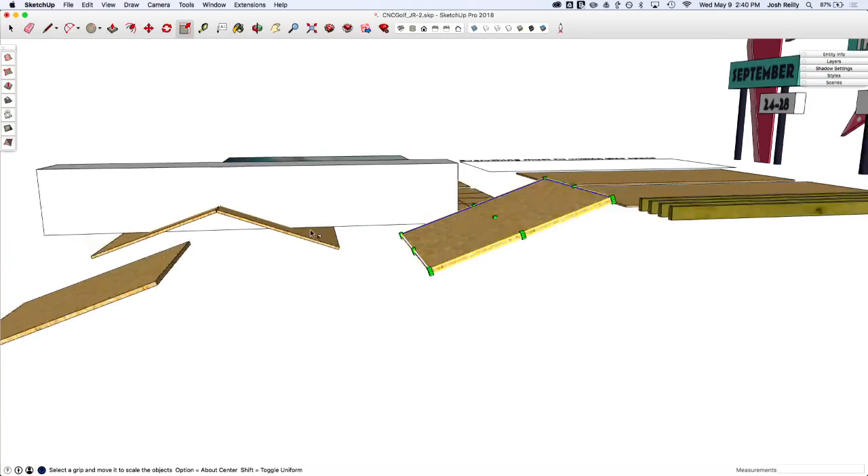Let's say I wanted to grab this board here and mirror it this direction. So if I copy this over here and try to use the scale mirror method, I certainly could do it. You'll notice if I grab that middle grip, go -1, enter, it's not mirroring it quite like I expected. So a pretty easy way to handle this is to make that copy, then explode the group, and then remake the group—right click, make group—the bounding box is now going to be like that, which then if I do the scale tool, go -1. It's actually pretty easy to remake your bounding boxes because the scale tool acts upon the bounding box. So you might want to do that.

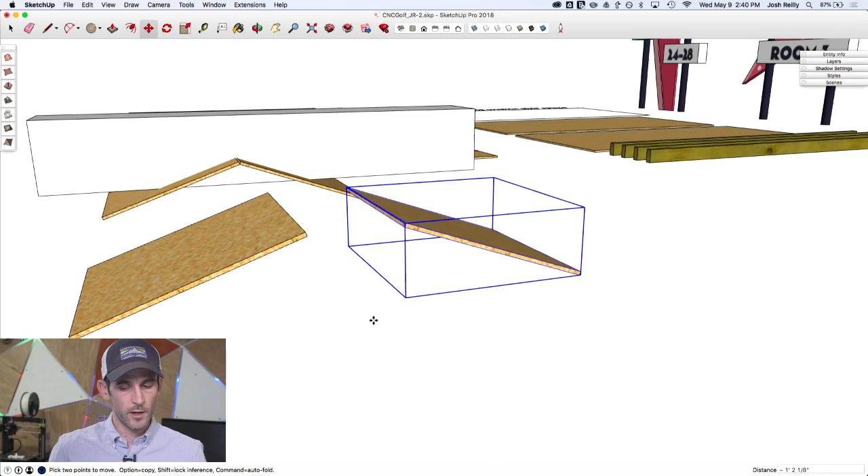If you wanted to cut through something—did you show Intersect with Faces, Aaron? I did not, no intersections. Aaron did something kind of like this, so let's say I wanted to use Intersect Faces here. Making a mini golf course like this, you probably will have a lot of opportunities to use Intersect with Model, Intersect with Faces. All that means is you make some piece of geometry just for the purpose of cutting out something else.

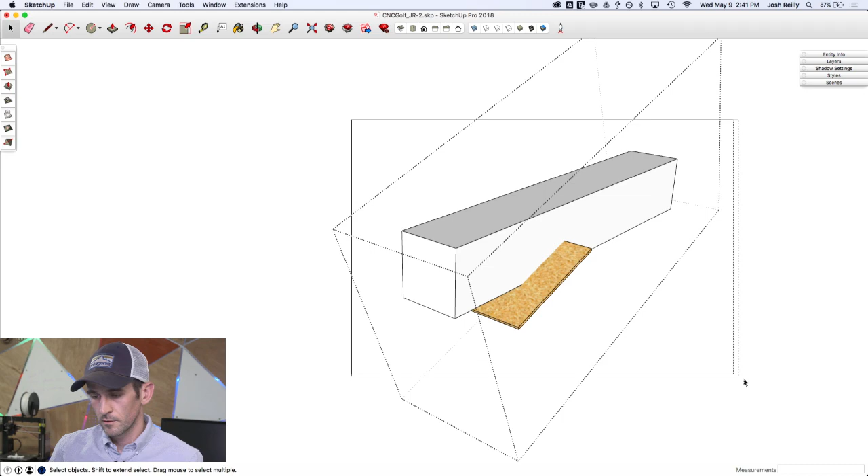So if I had this long thing here that I wanted to cut out of these two pieces, one thing I would do first is probably go to Edit, Cut. Then go into this group and paste it in place again—Edit, Paste in Place—and now it's in the context of the thing I want to cut. So if I select everything and then right-click Intersect Faces with Selection, I no longer need this thing, but I might actually keep it.

I'm going to edit, cut that again, and push and pull this away to clean up the rest. I'm keeping that because on this side I might want to cut that out again, but really what I should do is just mirror this one, and the same thing happens here. The bounding box isn't what I'd like for the scale tool, so I'll explode it, regroup it.

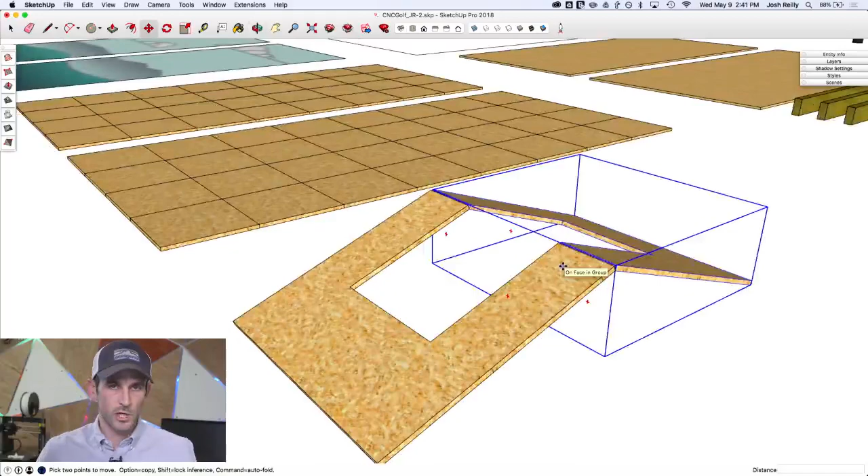Then scale tool it with a -1, and now I can slide that into the right spot. If I were really doing this, I'd probably want to keep that intersecting geometry for a platform, because I could intersect into that cutting piece and use it as a platform for the golf ball to go through. So that's one option.

Oh, I forgot my other model. I had a scene ready because I needed some color on this model, so I'll probably edit one of these to make it a little more appropriate for being at this mini golf hole. We'll just call this one real bold, beautiful signage here. 18th hole.

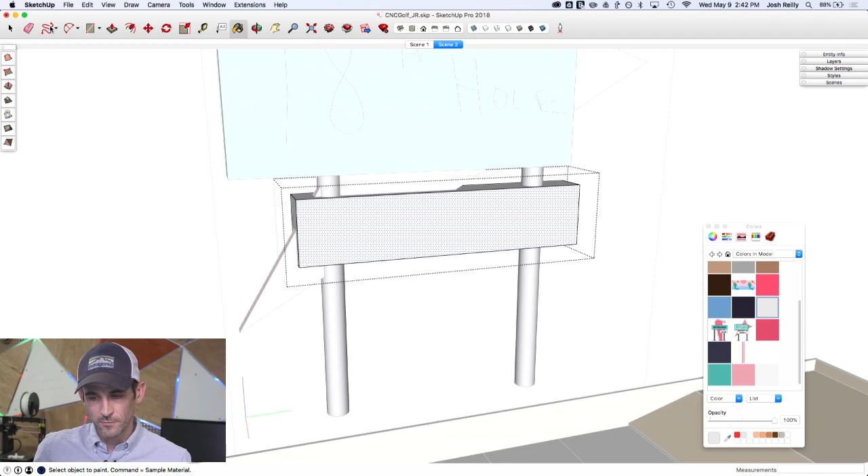There we go. This isn't Extension - Josh is doing that freehand, you guys. We'll copy this. I haven't tried this, haven't simulated it with the SketchyPhysics thing, but I'm going to say if you follow the hero's route, this is a par 2.

Okay, bold, it's a par 5. Speaking of SketchyPhysics, or MSPhysics which is out now, somebody asked if we could simulate with MSPhysics, and in theory, yes, that's 100% possible. We didn't set up for that because we figured we'd be modeling this whole time, which we have been. Yeah, it would be kind of cool.

We didn't make it as an option. I guess you could save an MSPhysics model with a ball and show us how you could play the hole, that would be kind of cool. Set up your model ideally for a hole-in-one and submit that. That'd be pretty sweet. Yeah, that sounds pretty fun, actually.

Another question regarding scale orientation by resetting the axis of a component - are you doing that? Yeah, let's take a look real quick. Before Aaron starts, I believe there's a skill builder on this that Tyson did, so you can search for our skill builder playlist and watch it there, or watch it now. There are so many skill builders out there I don't even know what's in there anymore.

Just to show real quick, I have some quick geometry right here. It's not coming through. Can you flip it and flip it again? Yeah, we're having technical difficulties. Go figure, try again, got to push the button, I think.

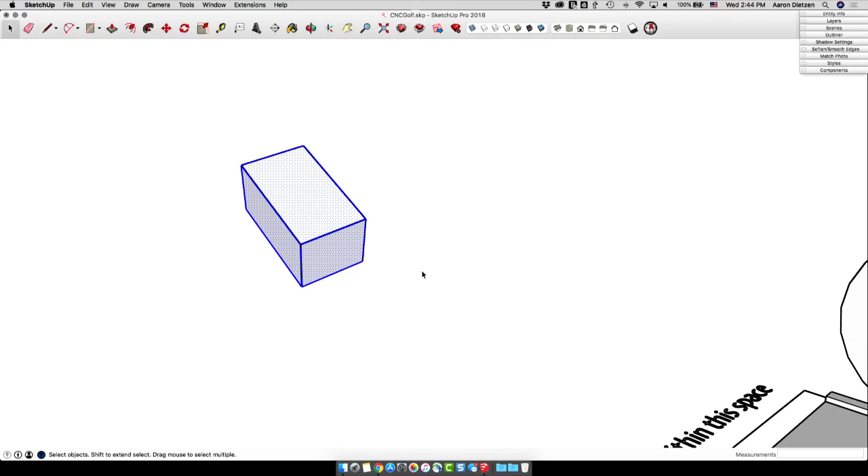Okay, so picture, if you will - go search for the skill builder Josh just mentioned. There we go, okay, we're there. So here I actually have an extruded rectangle, just a brick, and it's off axes. None of this is on axes, it's tipped both directions. If I make a group right now and try to scale this,

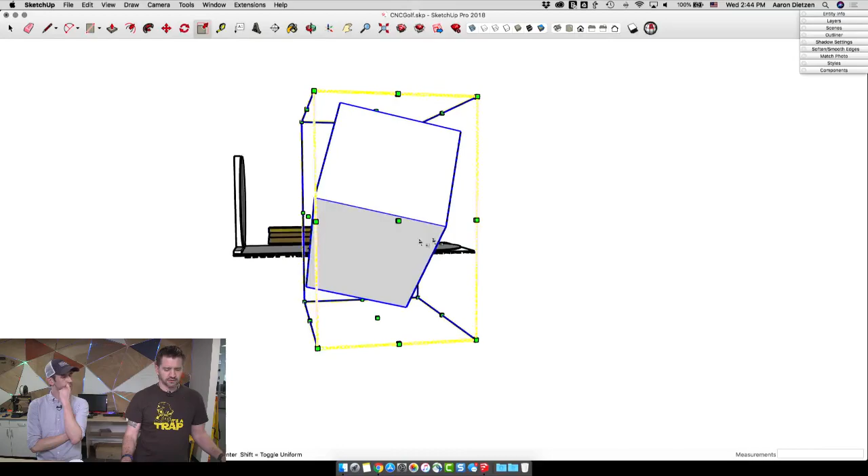it's going to show the scale handles according to the world axes, right - up, down, left, and right, red, green, blue. If I double click in here and grab the geometry, same thing - it's going to show my scale tool lined up to the world axes. What I can do is come in with this geometry and grab the axes tool and align it to the geometry. So I'll click on this point, pull the red axis up this line, green axis up this line,

and now if I come in here and hit scale tool, it'll show that relative to the geometry. I assume this question comes into play relative to something like a 2x4 - you go in, grab that geometry, want to make it longer or move it around, scale it, something like that. It can be tough when you're at a weird angle because you distort it. So you can always realign inside a component or group by reassigning the axes, and then all those scale handles line up properly oriented. So yeah, that's a good question.

I can show one more thing here that I just thought of.

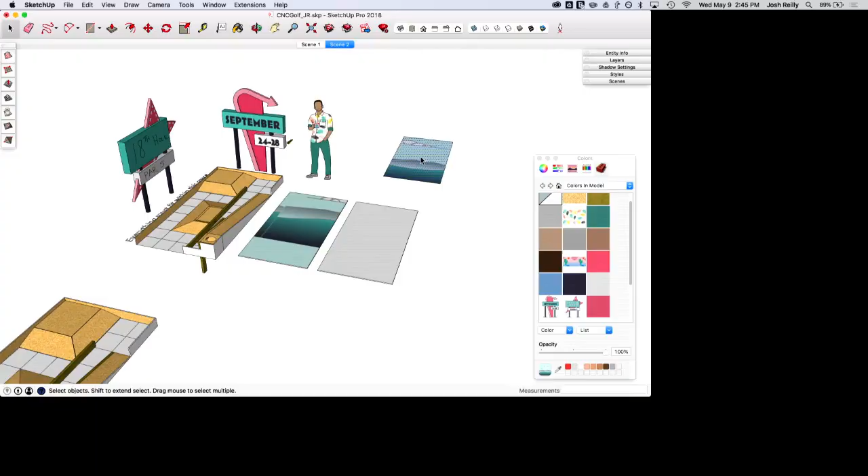I was showing the way to find out the area of a material by right-clicking on it and going into area and material. But as a lot of you probably know, you can just click on a surface itself. If you click on it with entity info open, it'll tell you that information, like here it is in square inches. If you shift select, it'll add to that area. So it could be faster to shift select stuff than trying to add material the right way for the material callout right-click to work. Maybe do that instead.

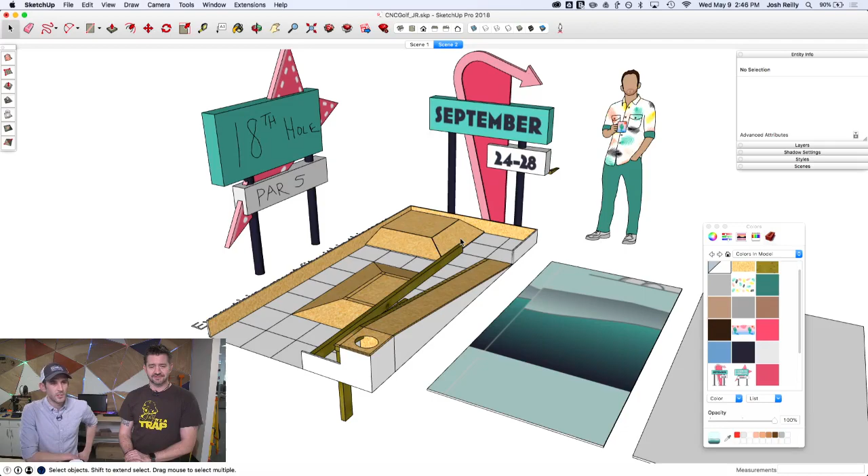Makes sense. And what else could we show, or is that about enough? Everybody seems to have quieted down, so any more questions out there? That means we may have just covered everything. There's no questions left anywhere. Oh no, I lied.

Importing fonts is the other question. SketchUp does look at true type fonts that you have installed on your system. So if you use the 3D text tool, for example, it's going to show all the fonts you have installed. Installing a font is usually pretty simple, dropping it into a specific folder or double clicking on a font to install it. Once that font is installed, it's accessible and you can use it inside of SketchUp. Nothing special about it, it's the system fonts.

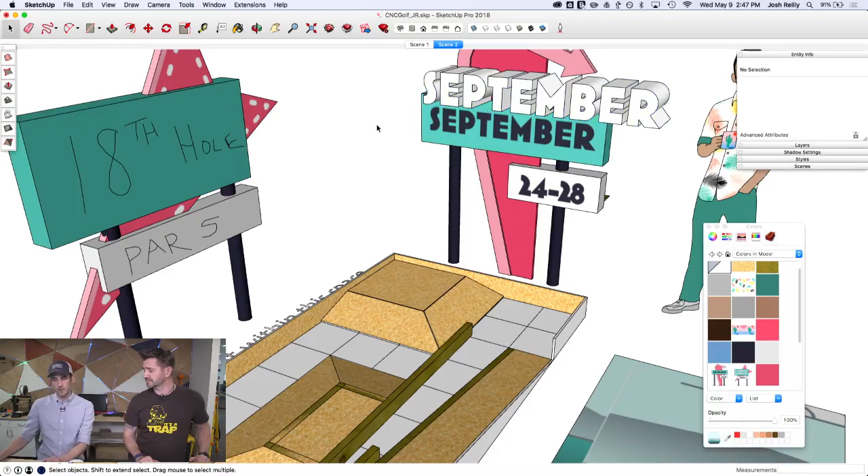That's a good question, because in this model I went and inserted a new font that matched what was on the signage. If I go in here, you can see that this font does match. If I place that in here, that's the same font on the sign, which is a non-standard font that doesn't come installed with the operating system. So if I wanted to take that sign further, I could use 3D text instead of the graphic to add some letters that pop out, give it some relief. Or maybe adjust my 18th hole sign with some 3D text because it looks a little weak at the moment. It looks rustic.

We had a question about 2D renderings, but I don't understand what a 2D rendering is. Are you talking about layout? Maybe they just mean a static image output, 2D export. That's possible. If I wanted to produce something ready to show somebody, I go to File, Export, 2D graphic, or 2D rendering perhaps. Generally speaking, when we use the term rendering we're talking about photorealism, and that's usually a 3D thing because we take into account where light falls, shadows, textures, materials. But you could export 2D drawings as well.

There's a question that's only two words, but I understand it: mirror extension. Yes, there are mirror extensions, if it really bothers you to use the scale tool and type -1, or flip along axes by right-clicking. Which I'm cool with doing, but if you want a mirror extension there's at least two I know of, both called mirror I think. I kind of like the scale tool thing, I'm just used to it I guess. But there's also a full skill builder on flipping or mirroring, several ways to reverse things. And there's a right-click flip along option too - in SketchUp, if you right-click on a group or component, you can flip along one of the three directions, which is nice if those are the only three directions you need. Those are choices, but that is an option.